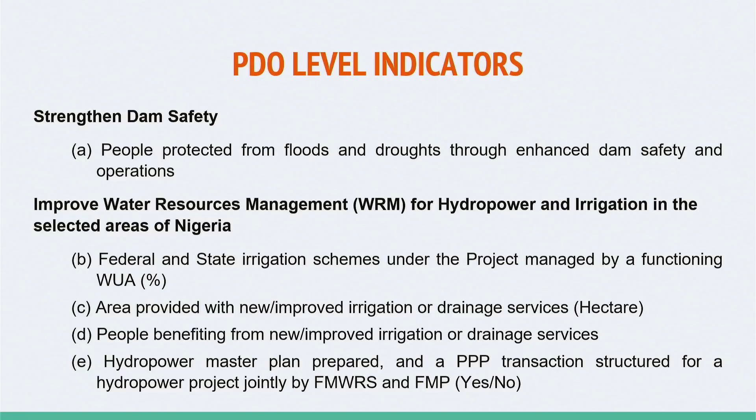So briefly, I will take us through components 1 and 2 because those are the ones specific to dam safety and the Department of Dams and Reservoir Operations.

On component 1, institutional strengthening and capacity building for water resources management, an overview is that the SPIN project will focus on strengthening institutions and building capacity for water resources management at the federal, state, and river basin levels, to promote integrated water resources management and achieve the food, water, energy nexus in Nigeria.

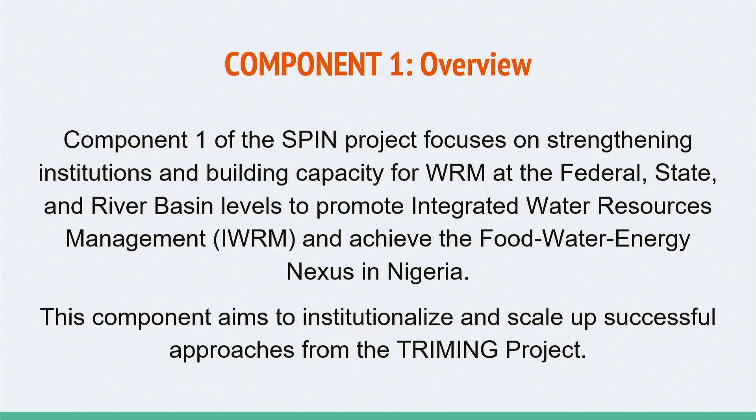This component is aimed to institutionalize and scale up successful approaches from the TRIMING project, which incidentally will be rounding up in a few days. So some of the key objectives and activities under component 1 include...

Strengthening regulation, developing and adopting the national dam safety guidelines and protocols, which was mentioned to us earlier. It is the first assignment or objective of the project. It will be led by the Federal Ministry of Water Resources and is a performance-based condition, which means that if the ministry is not able to do this, we will not be able to access the funds that are available for us to use for the dam safety component.

And for the irrigation side, it will be developing and updating water laws to legally recognize water user associations in participating states. This is actively being done right now because all the states that have shown interest in being part of this project have enacted their WUA laws in their states, and some of them are ongoing.

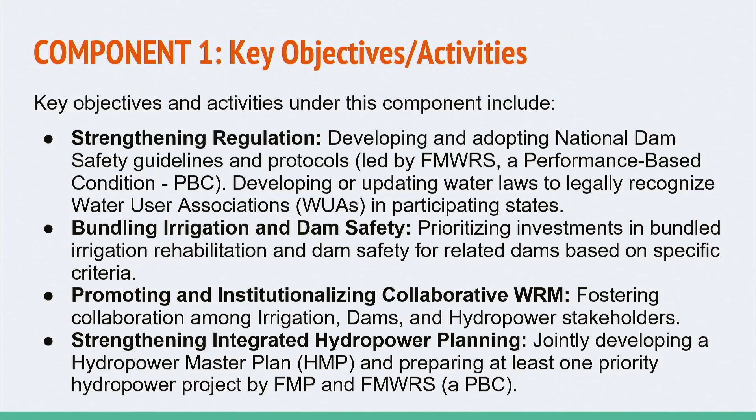Another of the activities is bundling irrigation and dam safety, prioritizing investments in bundled irrigation, rehabilitation, and dam safety for related dams based on specific criteria, and promoting and institutionalizing collaborative water resources management, fostering collaboration among irrigation, dams, and hydropower stakeholders. Then the last objective will be strengthening integrated hydropower planning, jointly developing a hydropower master plan and preparing at least one priority hydropower project by the Federal Ministry of Power and Federal Ministry of Water Resources, which also is a performance-based condition.

So I will move to component 3, which is specifically on improvements in dam operations and enhancing dam safety. This is an overview of that component. The component will strengthen the dam safety management system in the country and will rehabilitate and improve the safety of prioritized dams and associated appurtenances.

It is, however, good to note that the SPIN project will not be financing the construction of new dams. Planned activities are not intended to alter the original schemes and change their nature or expand dam extents to make them appear as new or different schemes.

Priority will be given, of course, to selected dams that provide downstream irrigation services to the schemes, which will be identified under component 2, which is on irrigation modernization, and to some of the dams we'll identify as high risk from the ongoing risk screening exercise we're doing. I think Engineer Ogumakiwa and Engineer Marvin will give us more details into that exercise.

The safety of dams is key to climate adaptation by ensuring water delivery for water supply, hydropower, ecosystem conservation, and irrigation to mitigate droughts, protecting against dam break flooding, and storing excess water to mitigate floods following high precipitation.

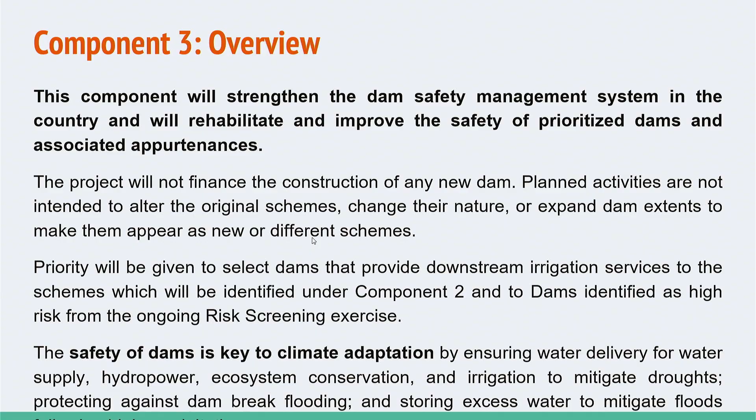Some of the activities and objectives of this component will be to conduct a dam safety portfolio risk assessment exercise, including establishing and implementing a risk indexing screening method for dams in Nigeria and selecting dams for rehabilitation works. This has been in earnest for some time now, and I believe over 20 dams have been screened so far, and it's ongoing. Our intention is to get to 100 at least.

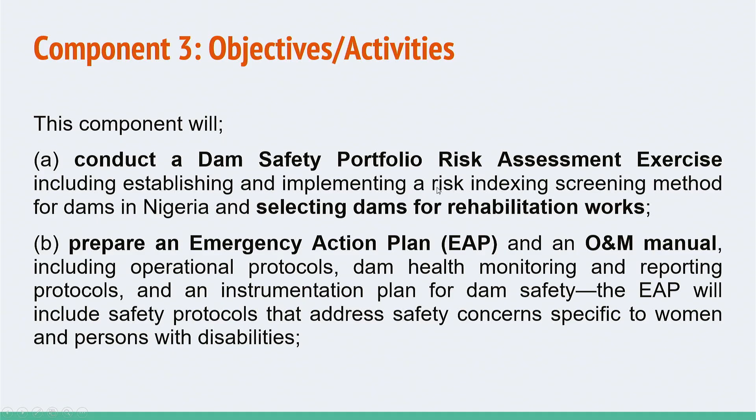Then prepare an emergency action plan and an operation and maintenance manual, including operational protocols, dam health monitoring and reporting protocols, and an instrumentation plan for dam safety. The EAP will include safety protocols that will address safety concerns specific to women and persons with disability.

And also to perform rehabilitation works, including measures for seepage reduction, hydrological and structural safety measures, strengthening of main dam body and foundation, and improvement of basic dam facilities and dam safety instruments.

And then to prepare and implement sediment management plans through bathymetric surveys and feasibility studies, piloting of institutional models, and plans for treatment of upstream drainage catchments with construction of sediment retaining check dams and riverbank protection structures.

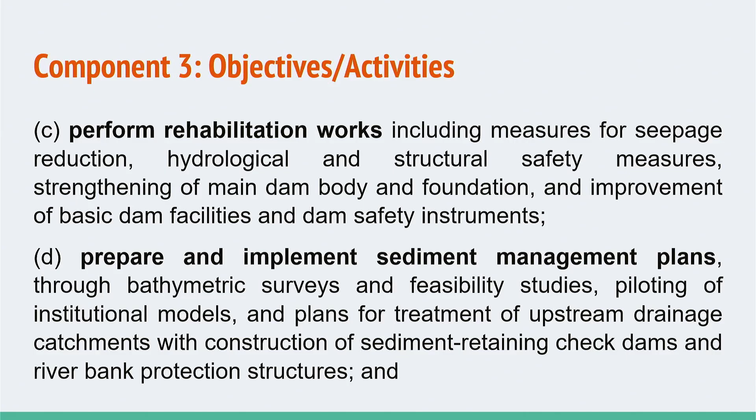And also to apply nature-based solutions to dam reservoir operations and management, such as the use of natural floodplains for flood risk reduction and improved sedimentation management practices through improved operation and mitigation of adverse land use practices within the catchment.

This is just a note to say additional details on how we intend to do this are in the project appraisal document and the annex of technical notes on dam safety.

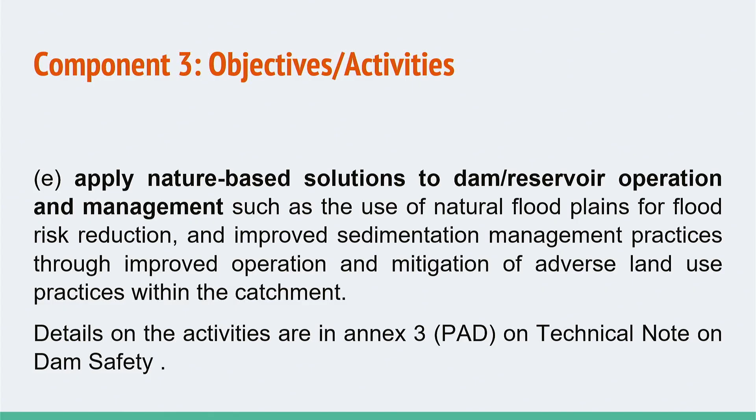So for the current status of the SPIN implementation plan, currently the loan has been signed by the IDA World Bank. The loan agreement has been signed by the Honorable Minister of Finance. The Federal Project Management Unit has been established, which contains the technical units on power, dams, and irrigation. The Project Steering Committee has been inaugurated, and the Federal Technical Committee as well.

We are currently in the process of engaging a dam safety review panel of experts that we will keep for supervising the implementation of the component on dams throughout the project life. The selected state governments that have met the required criteria are being engaged, and a formal implementation launch of the SPIN project will be next month, just as the TRIMING project will be rounding up on the 30th of June.

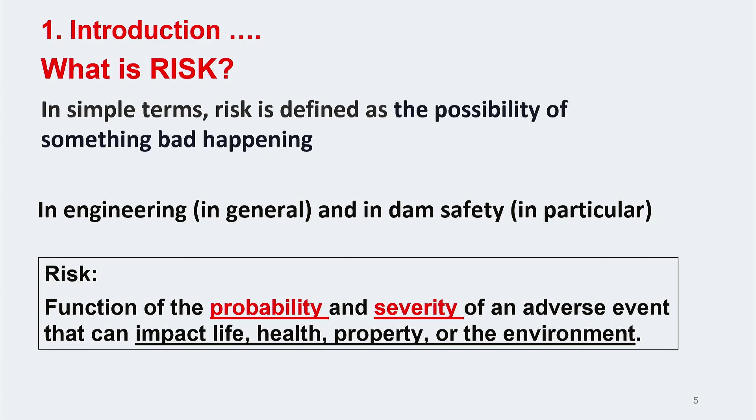So now the concept of risk assessment. I've discussed the probability - I'm sorry, I was supposed to have taken this presentation with Engineer Dixon. Okay, so thank you very much. I think I need to bring the mic closer because of the online participants.

So the concept of risk assessment, like I said, has to do with measurements. And risk assessment in dam safety provides characterization of probability of adverse consequence to people, property, and the environment resulting from dam failure. Like I mentioned earlier, we'll always be referring to the consequence of the things we do, and they can be measured in the way we know, of course, the probabilistic way.

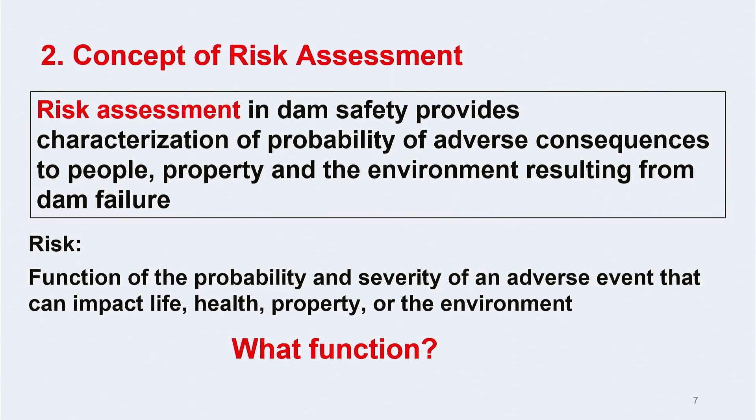So when we are talking about a function, then a function of what? Certainly some parameters have to be clearly defined. Here, we now look at risk as a function of probability and, of course, consequence. So now we are talking about the measurements and how you can express it - it has to do with the probability, which relates to consequence and severity. That is the measurement.

And the other method is by analytical method, which is usually based on rigorous calculation. And of course, even the graphical method usually comes from the analytical method and is expressed in graphical form.

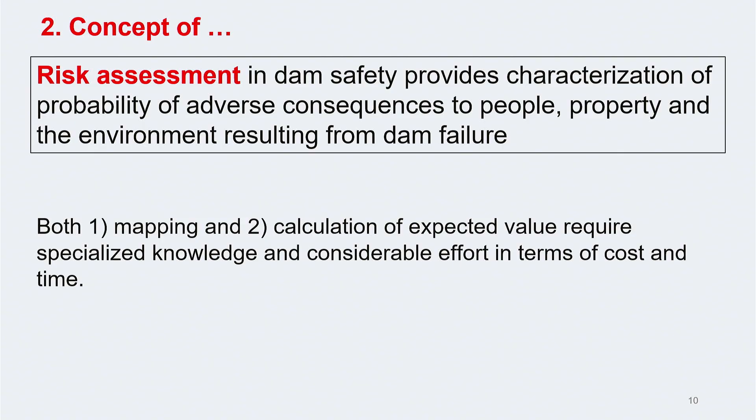But since a new approach has been presented, this is the risk indexing that we are talking about today. It has been mainly presented on the project of the World Bank, especially during their intervention in India and Brazil, and we will be able to have more details of what risk indexing is all about.

If we go into their website, we'll be able to download this document on portfolio risk assessment using the risk index method.

So the purpose of risk indexing is to develop the risk profile of the entire portfolio of dams. Perhaps when they are making interventions, there will be a series of dams in a portfolio, like Dadinkowa Dam, Gurara Dam, Chalawa Dam, Tiga Dam, and a list of so many. You can't just, within a framework of funding, say you are going to rehabilitate all of that. You have to provide a very justifiable method that is scientifically proven to make this assessment and then take decisions.

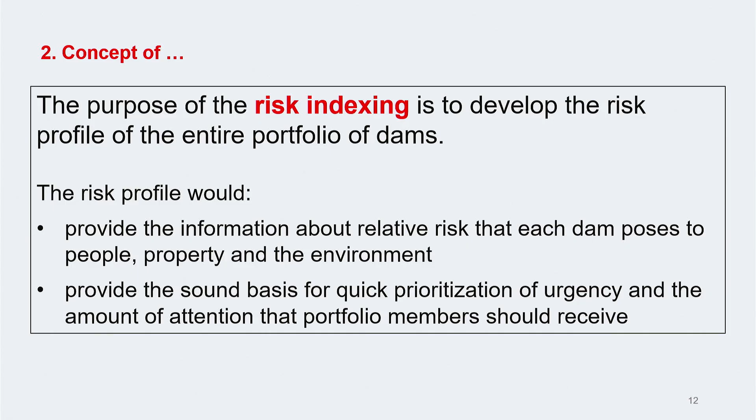So by the time you have the list of all the dams and you have done the risk indexing, you will be able to do a profile that looks like this. Assuming Dadinkowa is dam 1, and Gurara Dam is 2, you have 1, 2, 3 in that order. You find out that the risk index is the one reflecting on the vertical column, and the higher the risk, the higher the index.

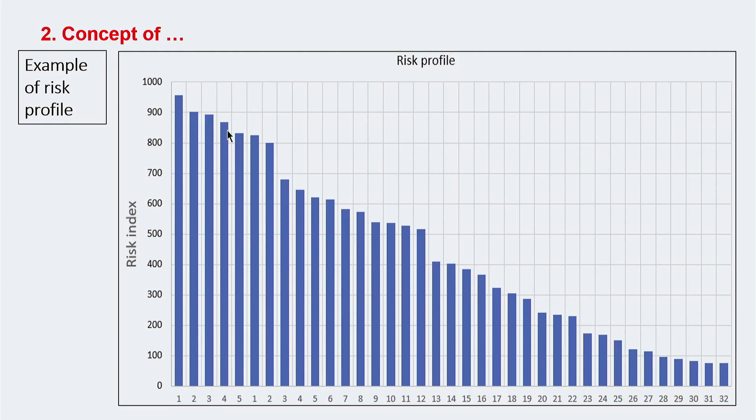So now the risk indexing tool. Just a brief background on the risk index. What is risk index? It has to do with a function of fragility index and potential impact. So you can see how it is expressed as a function. Risk is always a function.

Unlike what you have in the probabilistic method of measurement, where you have to do a ratio or provide them in percentage, in this case you are going to determine all the parameters as indices.

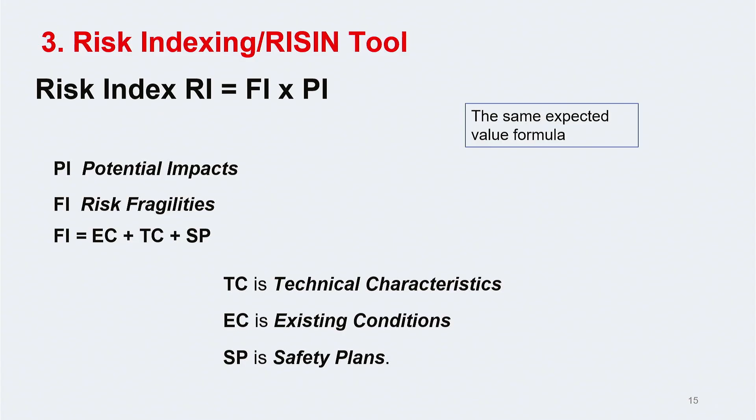For the fragility index, it is expressed as a summation of the existing condition, the technical characteristic, and the safety plan. So there are three key aspects that you have to sum up: the existing condition (EC), the technical characteristic, and the safety plan. These parameters are clearly defined there.

So at the end, these are the composition of all the parameters in each of those indices. For technical characteristics, you have issues of aging of the dam. As the lead presenter has noted, over time, whatever you do and whatever you don't do may affect your dam, and this has to do with when a dam is constructed over time. So the issue of age — an index has to be provided on whatever you have been doing on the dam.

You also have issues of design, which he also noted, so you have inflow, design flood, and of course the hydrology. You also have other parameters that have to do with the location, the seismic activities, the landslides and the stability of the land. You also have issues of the length of dams, then the appurtenant structures like the conduits, the spillway, and all of that, including filters and the foundation and abutments at each end.

For the existing condition, when you visit dams, the status of the dams has to be reported, and it could be positive or negative. It could be issues of seismic resistance, or availability of flow discharge capacity data, the flow discharge, the backup plans and backup powers, and all issues that have to do with the existing conditions. So physical condition of the dams during site visits is very crucial.

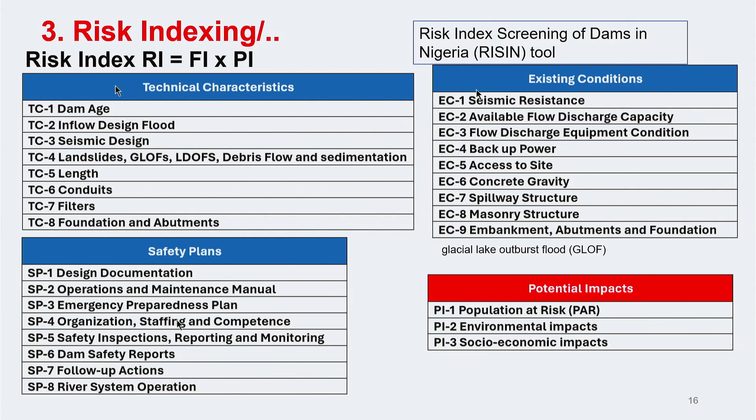Yeah, still on the index, RISIN indexing. So the probability, now how do you index? The issue now is how do you do this indexing? So unlike the probabilistic method, in this case, you have to provide a scale. It's either you are providing a weight or you are providing a score. And this score has to be scientifically justified.

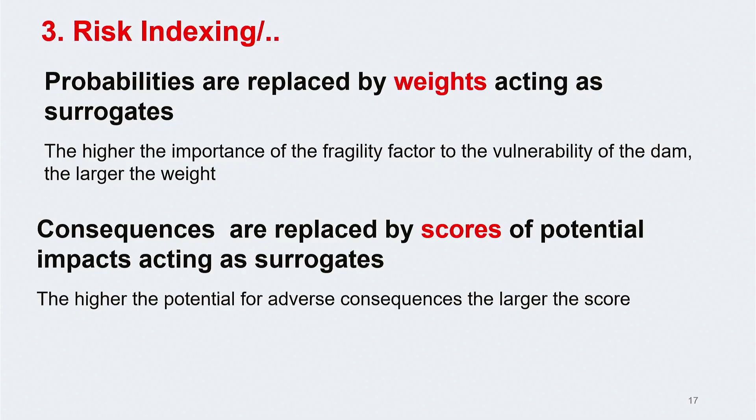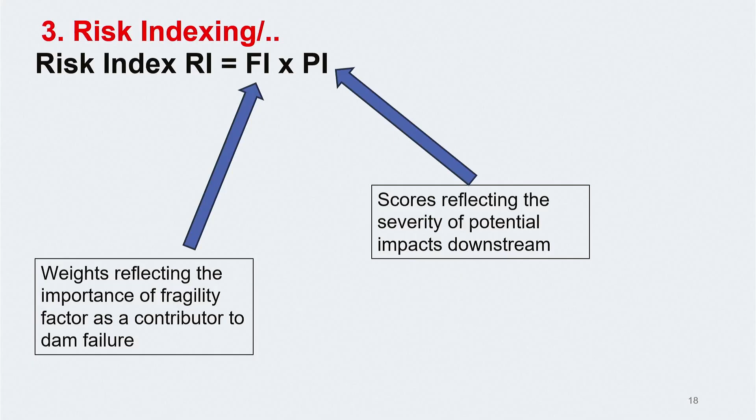For the fragility index, the probability in this case will now be replaced by the weights, while for the potential impact, these ones will now be replaced by the scores. Here, RISIN indexing is once again expressed as a function of the fragility index and the potential impact. So for each of them, like I earlier mentioned, the fragility index will be weighted while the potential impact will be scored.

So at the end, an Excel sheet was produced. The Excel sheet has all these parameters aggregated into it. So you have various parameters. This is the case of the technical characteristic, a reflection of the land form and the stability of the land. So you have different information that have been populated in this tool, which will guide you to perform scores. The scores have already been defined there, and all you need to do is fill in the scores in the red portions that have been highlighted in this sheet.

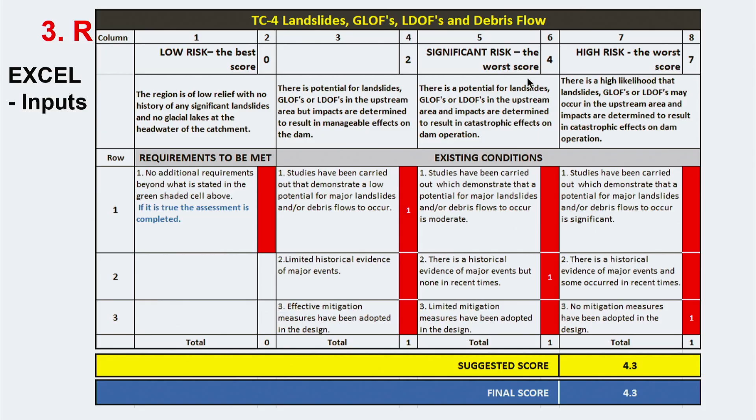So the aggregated score will now be provided. The aggregated weight will now be provided. So in the tool, you also have the input section and you also have the output section. This is a key reflection of what you see in the output section. So at the end, this information for technical characteristic, existing condition, the safety plan, and of course the potential impact are aggregated and then presented either as a percentage or as the index, as the case may be.

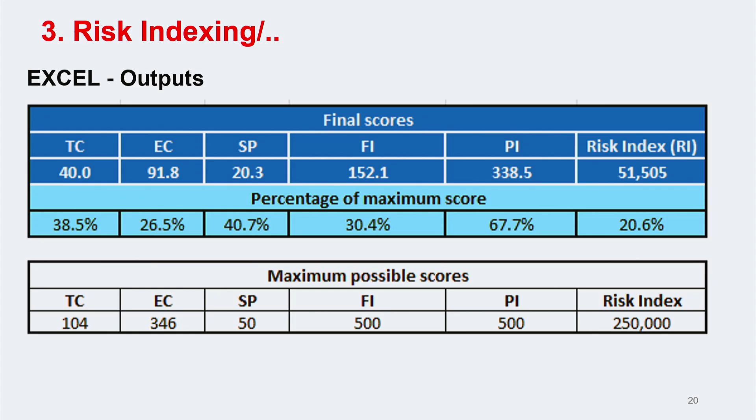So the spreadsheet will also provide you the summary of all the parameters that you have created. So you can see here for the technical characteristic, you have the various scores and the percentages that have been scored for each of the parameters that are associated with technical characteristic. Similarly, with the existing conditions, you have the scores and, of course, the percentages expressed and summarized as related to all the parameters that has to do with the existing conditions.

So how did we come about these scores and this weight? I know this question will be in your mind. Before the workshop that was held in November, experts were actually given some of these parameters to assess. And then based on their judgment, they had submitted various scores. And before then, there were also some analyses that were presented that were made based on an analytical hierarchical process.

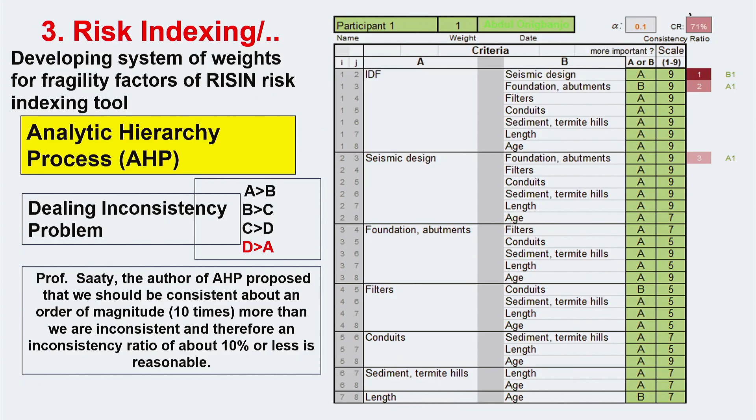So this is a presentation of one of the parameters, that is the technical characteristic, and what was provided by the AHP versus what the experts have provided. So you can see that if you juxtapose these two together, they are within the same tolerance of 10%.

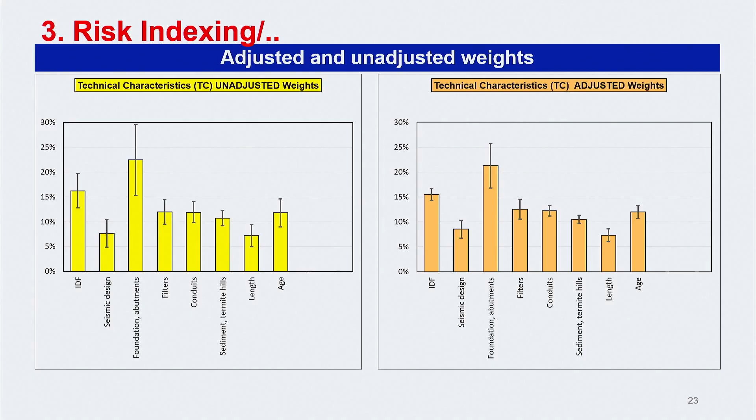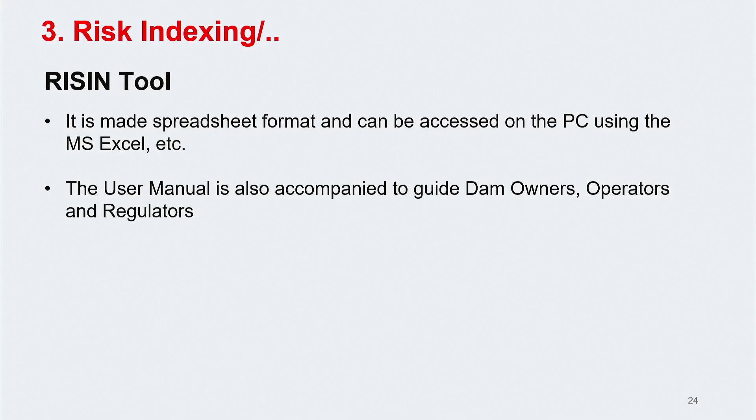So just a quick summary. The risk index tool has been provided as a spreadsheet, and it can be accessed either in Microsoft Excel or in other formats that can be adopted by spreadsheet software on your personal computer. So we also have a user manual that we can share with participants that will guide them on how to fill in the tools.

So the next session is the progress of risk screening of dams in Nigeria. During the workshop in November, 21 dams were successfully screened. The risk assessment and screening of the 21 dams were successfully completed during the workshop for the development of risk screening tools in Nigeria.

Based on the risk screening, you can see the risk index profile expressed, and it is easier to make a categorization of the risks. The highest risks are highlighted within the red shaded area. The medium to moderate risks are those highlighted in pink and yellow. And of course, those with lesser risks are the ones in green.

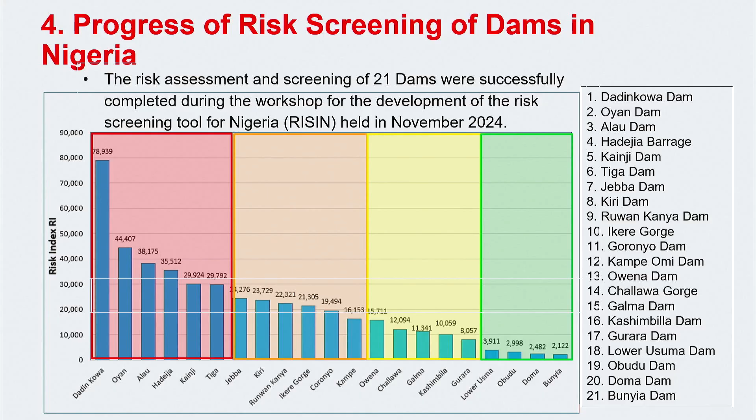So you can see the list of the 21 dams that have been assessed. And currently we have more dams, the risk screening of more dams ongoing. Like it has earlier been noted by the presentation on the SPIN project, 100 dams have been targeted in Nigeria for the risk screening within the dam portfolio.

So in order to achieve that, a quality control and quality assurance team has been established, and currently they are working to ensure that the screening of 42 dams are completed by the end of this month.

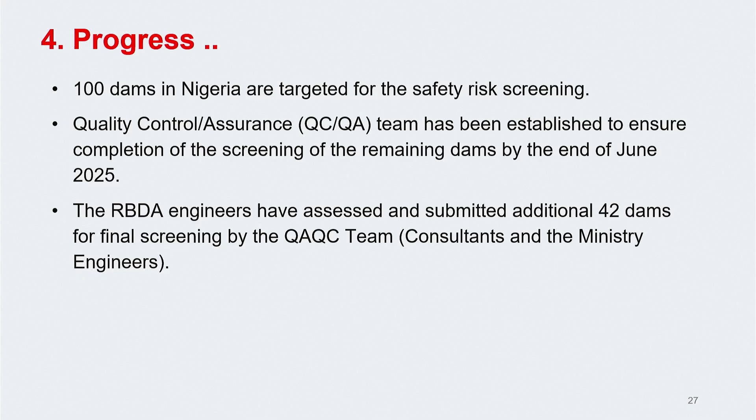So what are the challenges? We all know that data availability is a problem. This is a peculiar challenge for all those who have been carrying out the assessment of the risks of dams in Nigeria.

And it is a major requirement. Data are a major requirement for the risk screening tool, and without data, the quality of assessment can be greatly impacted.

During the risk screening, we also have more information that could not be accessed from the river basin, and those information are largely associated with the technical characteristics and issues, even field visits to assess the existing condition. Safety plan documents are also not available.

Like it was earlier noted, even issues of emergency response plan and preparedness are not available to ensure that population at risk are adequately safeguarded in the event of any emergency.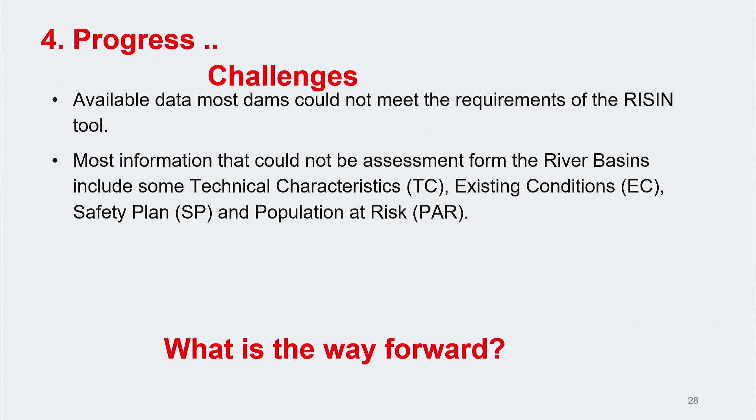So just a final note, the RISIN tool offers a modern and simplified means for safety risk screening of a set of dams in a portfolio. The tool has been successfully utilized for the screening of risk index of 21 dams, and we still have more dam screening ongoing. Well, in itself, it is not a means to an end.

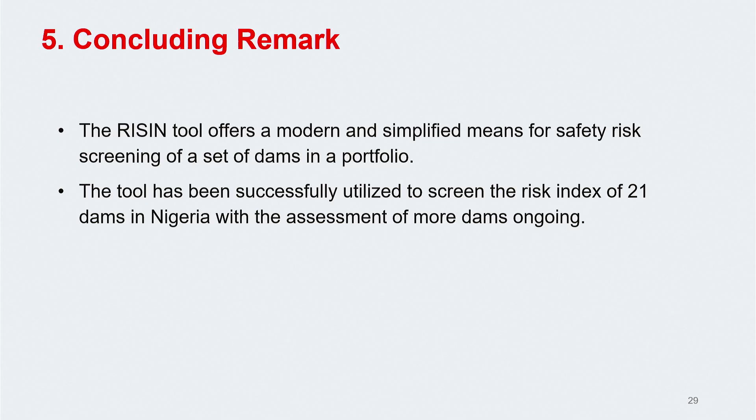The note is this: although the information obtained with the help of the risk index can be extremely useful for preliminary screening or ranking of riskier dams, especially for a large portfolio of dams, it is recommended that those identified as higher risk dams should be subject to further detailed risk assessment using PFMA or other qualitative and quantitative risk analysis.

This will inform decision making on priority remedial works at the next stage.

So it is just a way to pass across to us that as much as decisions are made, there will also be need for further technical analysis. The PFMA has to do with potential failure mode analysis. Then the quantitative and qualitative has to do with the technical aspects that will ensure that these dams are actually suitable for intervention. At this juncture, I want to thank you for your attention.

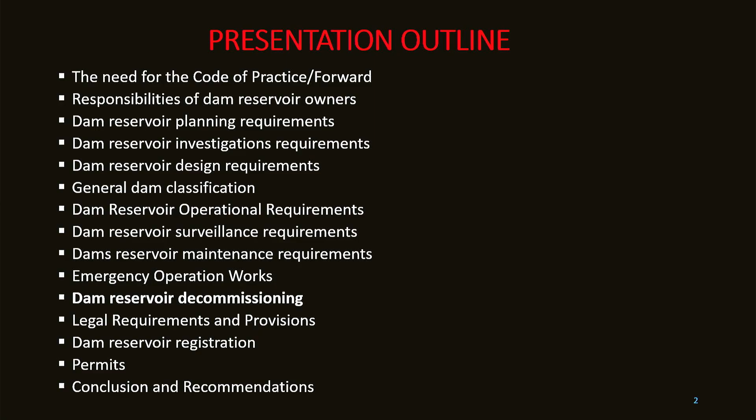Now, let us look at the forward itself. The Nigerian Code of Practice, where it talks about dam reservoir operation in Nigeria, was actually prepared by a technical committee made up of almost all the stakeholders in Nigeria. This code is quite applicable to issues of development, operational procedures, specification for personnel, and equipment to ensure safety, and the management of most of the dams that we have.

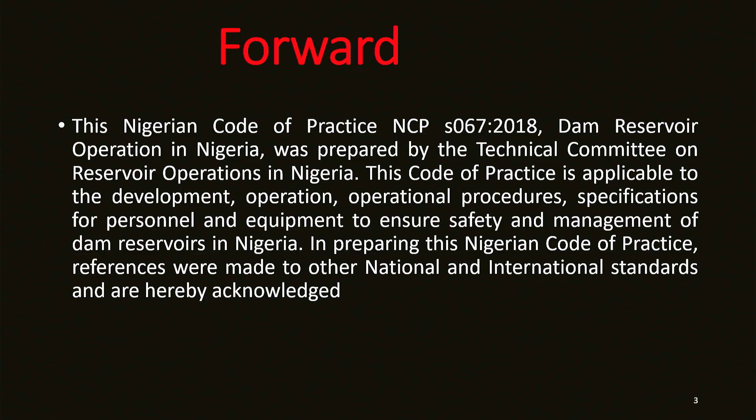In preparing this code of practice, references were made both internationally and nationally. We looked at all the codes in existence in most countries, and also looked at what we have in Nigeria, before coming to the final conclusion.

You quite agree with me that, as a form of introduction, dams are normally built to control or store water flow, basically, but we're going to go into some of the classification as we move along. Dams have occasionally failed, and uncontrolled release of water sometimes leads to serious consequences in terms of damaging infrastructure, lives, properties, and so on. This is what we want to avoid.

It has also become very necessary for us to look at the various guidelines we have, and what are the standard procedures as regards minimizing the risk impact of most of what we have.

When I was giving the goodwill message, I did mention that the dam department, which represents the Federal Ministry of Water Resources, is actually the EFCC. People don't look at it from the technical aspect, what they are supposed to be doing, and to ensure that the lives of everybody is safe for all of us to actually be in this country. So it is actually intended for safety purposes, which is in line with what we are here for.

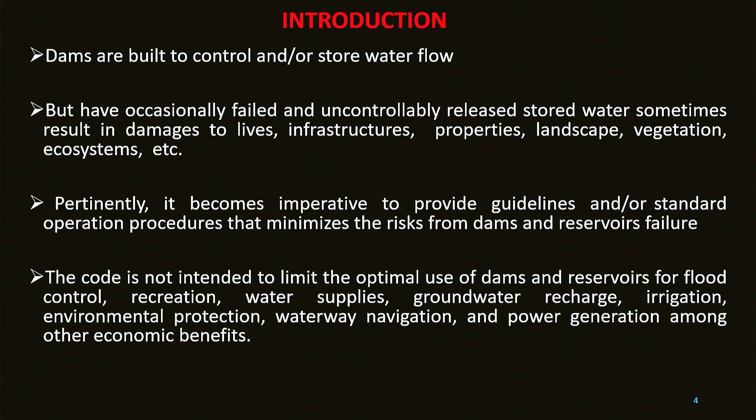Now, let me also make mention that the code itself does not really limit it in terms of the various water supply that we have, flood control, recreational, no. But how are you going to operate most of this to ensure that there is safety in terms of whatever we are doing?

I use this to kind of relate what we have at the moment and some of the things I'll be mentioning. Those of you who are quite familiar with Goronyo Dam, this is what you have in there. Now, the cross-section that you have there, in terms of the various clay layers as part of the embankment, and of course, the various lithological units within the dam, and how do you monitor?

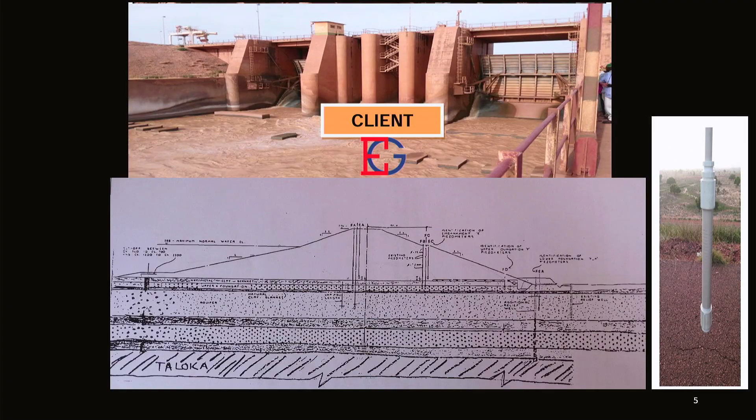Now, the small test tube you have at the right hand of it, we noticed that after the dam construction, actually it was completed in 1983, we noticed that most of the monitoring system that you have there were completely blocked. And for you to have safety, there's a need to have most of these very important aspects in terms of the monitoring.

So, for the benefit of everybody, and also for just refreshment, to refresh your memory, we just try to look at what is even a dam. And of course, it's strictly just an artificial barrier.

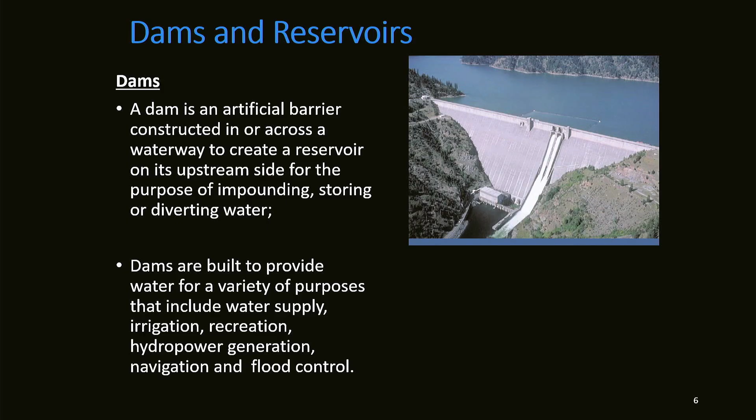It's constructed, it could be across to ensure that water is trapped, and of course, to impound this water for storage for different aims and objectives, like water supply for example. It could be irrigation, recreation, hydropower, and flood control. This is just for what I call a refreshing kind of reminder.

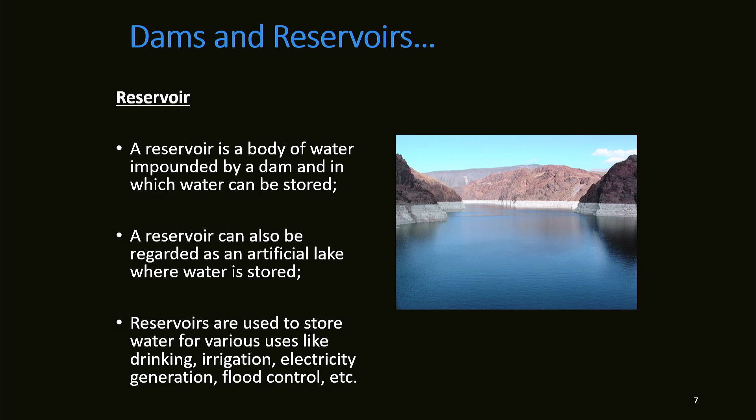Now, sometimes in the code, you'll see differences between reservoir and dam, and sometimes there's always this confusion. We'll be using it interchangeably because when you talk about the structure, you talk about the water that's impounded within that particular structure, excluding groundwater reserve, because when we talk of groundwater storage, we also refer to them as reservoir. But in this sense, we are not strictly referring to groundwater input. So let us take note of that.

Now, very importantly, if we're talking of failure, we're talking of safety, there's a need. I think the first presenter in the morning did mention quite a lot on some of those definitions. For the Goronyo project, our aim was to do this installation to ensure that the issue of monitoring is actually enshrined or reactivated within the dam, and also to ensure that the safety is maintained.

When we want to talk about failure, we're referring to the catastrophic characterization of sudden release of water. And when you have this occur, it goes with quite a lot of damages, either to properties or materials, especially when the course of passage is blocked by development and, of course, a lot of structures, which has actually happened in most of the areas that we have today.

So the safety aspect is the act of ensuring that the integrity and the viability of the dam is maintained, and as much as possible is not a risk to properties, to life, and to the general environment. Let us take this in context, and based on this, that is why the code is very, very important. There's a need for us to have a procedure so that when you are talking of safety, you are talking of failure, the bottom line is we want to protect life and properties.

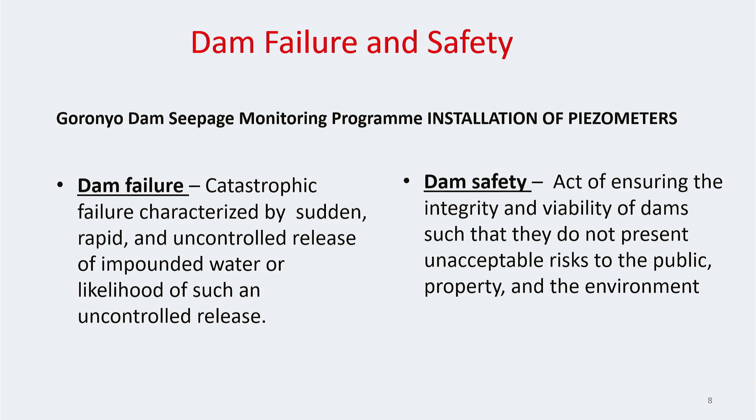So, why the need for the code?

Having given the introduction, we felt that the code should provide guidelines and the minimum standard in terms of the dam, the reservoir, as regards safety, covering aspects like what has been mentioned in terms of inspection, monitoring, operation, and maintenance. It also emphasized proactive emergency planning geared towards ensuring that the vulnerable community downstream are informed at the appropriate time to ensure that nobody suffers undue losses.

It also outlined the minimal requirements that are supposed to be followed in terms of national application. The code identified the potential risks associated with such reservoir operation, like flooding, structural failures, and environmental impacts. These are very, very critical when you're talking of such a code.

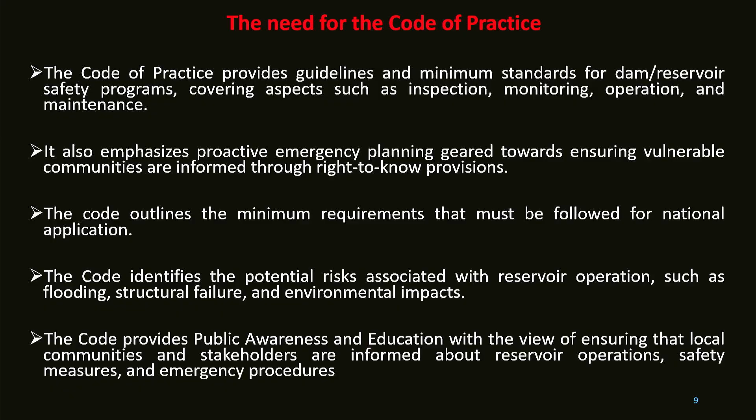There's a need for public awareness, for education, to ensure that everybody is carried along. Take the example illustrated by Engineer Labi. He mentioned that the villagers, the community in that area, noticed an unusual kind of movement within the dam area, and they had to report it. Within just a few hours, everything gave way. So that is why you need a constant reminder, education, and public awareness to ensure that most of these are taken into consideration.

I mentioned that I will be referring to a very practical example, the Goronyo Dam, and try as much as possible to synthesize some of the things that you need to do, what is very essential in protecting and looking at the code.

The first is the various characteristics of the dam, as I mentioned. It's a large capacity dam. In a while, I'm going to tell you the various criteria. Most of you are engineers here, so at least just a reminder. And of course, what type of hydrological zone? We have almost 8 hydrological zones in Nigeria, and where does this one belong? The river that it's talking about. So it gives you the characteristics of that particular dam.

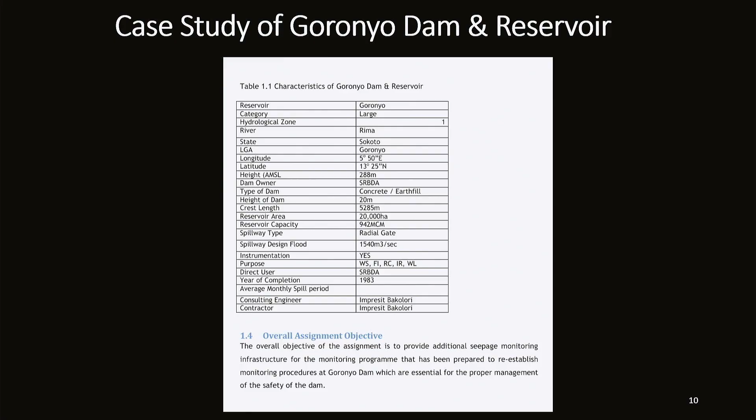Next, you have to look at the lithological formation that we have in the dam in Goronyo, for example. Now, for about 0 to about 15 meters, a kind of embankment was done, and these are mainly different compositions before you came to the first, what we call the clay blanket. From the clay blanket, to the second one, there's a kind of intercalation of a lot of sandy material within those areas. And of course, another layer was done before you came to the last aspect, which is the second blanket.

Now, this is very important because if you have to monitor, for you to assess and do your portion as a dam owner, as the site engineer, there's a need to have a mental calculation of what you are doing. And this is where monitoring is very important in terms of whatever structures you want to put in there for you to be able to do that.

Sometimes when we just talk of monitoring, people look at it as something you just look at and move on. Even for you to install a piezometer, for example, takes quite a long process. You have to do a lot of drilling.

The one that has been vandalized took us quite a long time, we have almost 43 of these piezometers drilled. Of course you have to first ensure that it's appropriately logged for you to know what formation and how you are going to do your final installation.

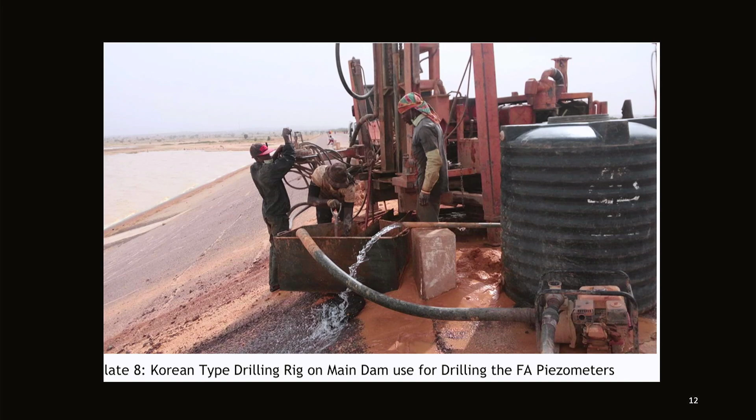Most of the time for the layman, a borehole is just a structure that can be drilled either by hand or by well for you to extract water. But technically, we are looking at a hydraulic structure that when properly designed and constructed will permit the economic withdrawal of water. So for you to be able to monitor, there have to be certain conditions that are quite necessary, and these are very important, especially for monitoring in terms of safety.

These are some of the ones especially at the top of the crest. In here you have quite a lot from the various stratigraphical columns in the main crest. These piezometers are structured in such a way that you can monitor so that any kind of deviation from what you have there, you're able to report exactly that there's some crisis. That is the whole idea of monitoring.

Dam inspectors, especially in advanced countries, are well paid. I don't see why you can't make quite a lot of money just being a dam inspector. If we have over 400, 450 dams in Nigeria, we don't even have the personnel to ensure these are adequately monitored, to have that extensive on-the-spot assessment and good documentation in terms of data collection. We have to revert this.

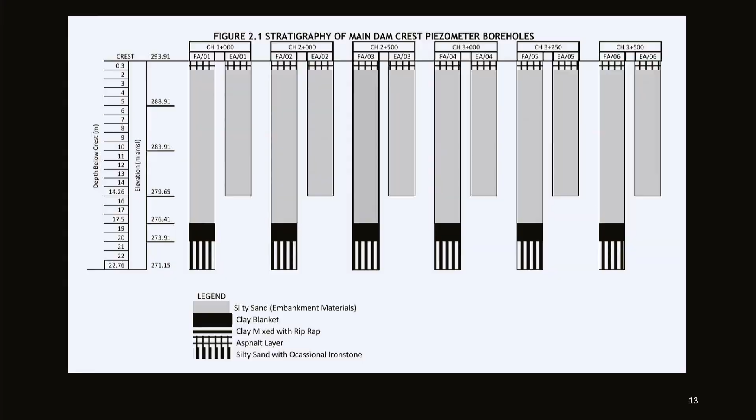We also look at the various aspects that it takes. Now when you just have a piezometer, people look at it like, what does it take? As an engineer who is supposed to be supervising, ensuring these are done appropriately, there's a need for you to understand what things are put in place for you to have that data we're talking about.

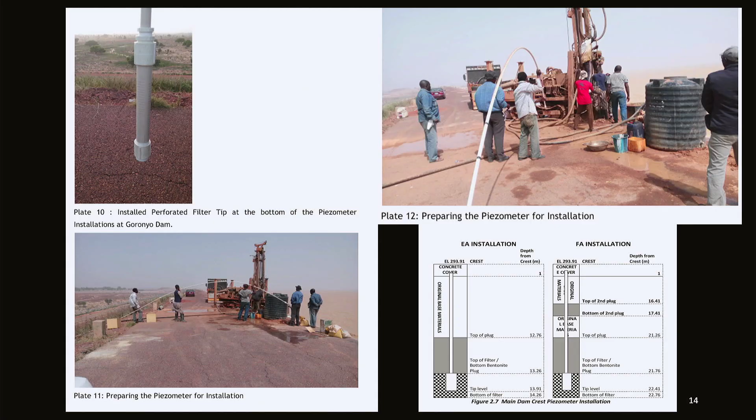This is just a small illustration where a lot of the drilling is taking place. These are special piezometers formed through the manufacturer, because you have to give them specification or what type of piezometer you have. You have to come out with the various designs to arrive at this, so that anytime you are measuring, you know you are measuring based on facts. These are quite critical for all of us.

At the end of the day, you have this kind of structure where you can just open most of this and take your measurement and document it. You could imagine taking a series of this data for months, for years and years, and effectively and religiously monitor it. Then you're able to see how safe those dams that you're actually looking at are.

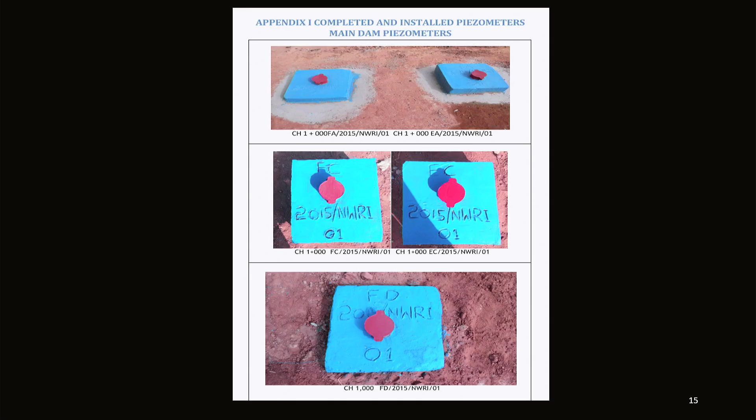So it's very crucial that we take a look at all this. At the end of the day, you're going to have a series of data from that monitoring that will help you interpret the safety in terms of management, and whatever could come in terms of collapsing of most of what you have in that dam, which will bring risks to the structures.

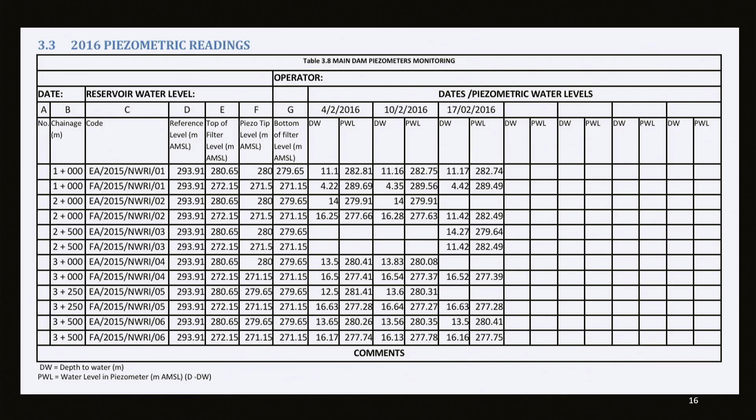So what is going to happen now in terms of responsibility? There's a need for us to know the responsibilities of the dam owners, the reservoir owners. What it means is that they are supposed to obtain a permit for the construction and safe operation of the dam. It's like you cannot just drive without a driver's license.

I want to implore especially all the various management of dam departments here: you should take it as a project, go around all the dams, request the certificates of most of those dams. Where did you obtain the permission to construct a dam? This must be put in place so that we can have a well-structured, well-orderly society where people don't do things without the laws.

There has to be a well-registered professional, like a water resources engineer or civil engineer, who is going to man and operate this in terms of maintenance. You don't just see anybody mounting into the aircraft and say it's a pilot. No, you are supposed to ensure that most of those professionals are licensed by registration and are qualified to be inspectors of most of those codes that are supposed to be prepared, aligned with what is in the code.

Shall use the guideline provided in the code to produce documents that are mandatory to guide safe operation. So, if you go to the dam and there are no piezometers for you to measure, you cannot operate that dam because most of the safety conditions are not there. This must be taken into consideration so that the code is operated effectively, and complies with everything.

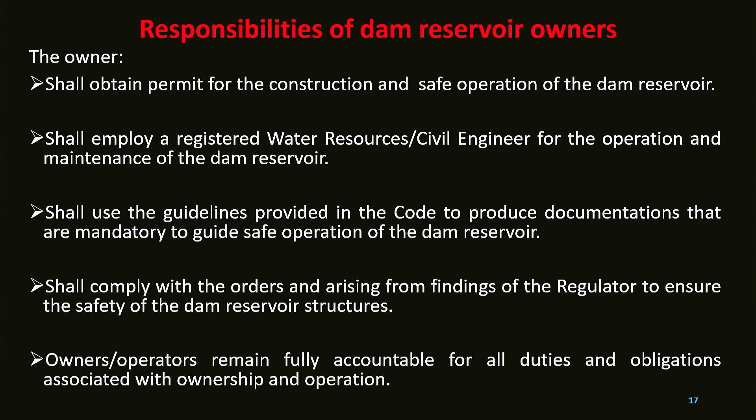So what are you supposed to do? We still also have the dam reservoir planning. There is no way you can even start in terms of the design or the conception of having a dam. There has to be pre-construction planning, as identified in the morning, to identify the very potential sites. It is not everywhere you can put a dam, as really pointed out by my friend in the morning.

These must be taken into consideration, and these are the permit criteria that must be given. Even if you are the head of state and you say go and put a dam there, as professionals you have the right to politely tell him that this place is not conducive for a dam. Why should you be wasting money when it is not conducive?

Now when, for any reason, the dam decides to fail, who are the people who are going to be responsible for this? I think we must come back to our senses and we must do the right thing at the appropriate time. We must define possible project configurations.

We must establish the type of project that is quite necessary for the best site to be sited, based on the appropriate technical consideration. In addition to the preliminary planning stage for the dam, the following must also be taken into consideration: the formulation of the project purposes, the timing, so that you can be able to get the necessary permits that are required for this.

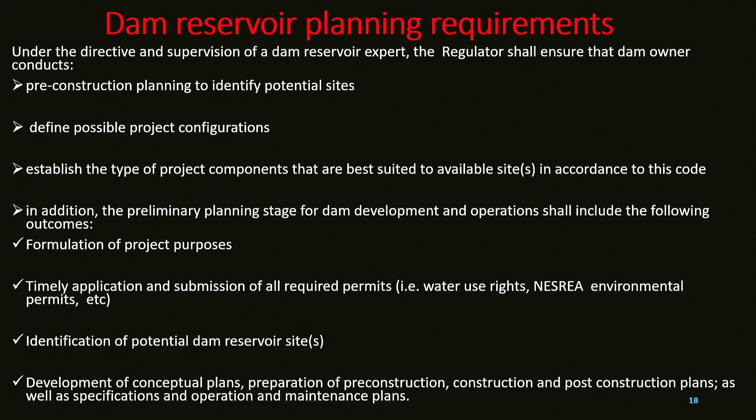We must identify exactly the potential of the dam. We must develop the construction plan, prepare in terms of construction, and the post-construction plan, whether it requires decommissioning at a particular stage. All that must be taken into consideration.

We must also look at the various stages that are quite important. For example, it involves reconnaissance at the first stage. These need to be gathered in terms of information that are quite essential. We must have a conceptual plan that is based on facts and not on orders from above.

We must complete the selection of the desired project sites for the final design, and when it comes to the final design, the right things must be done. At this stage, you must constitute the investigation team made of engineers, hydrologists, and hydrogeologists, to ensure that the appropriate thing is done. Stage 2 shall include, for example, the technical investigation.

This entails the geological aspect, because whatever we are putting on the soil has to do with the geology. You must ensure that the geotechnical aspect is put in there to corroborate whatever the hydrogeologist, the geologist, and the geophysicist have actually obtained. For example, you are carrying out the geophysical survey to determine the type of formation, not just the formation, but also the content of the clays that we are having.

There is a particular method of doing this. If, for example, you have the crest, there are positions you must ensure the central electrode is adequately positioned to be able to know exactly what type of clay formation, at what depth, how long it is, how extensive, and also what is the plasticity of that particular clay formation.

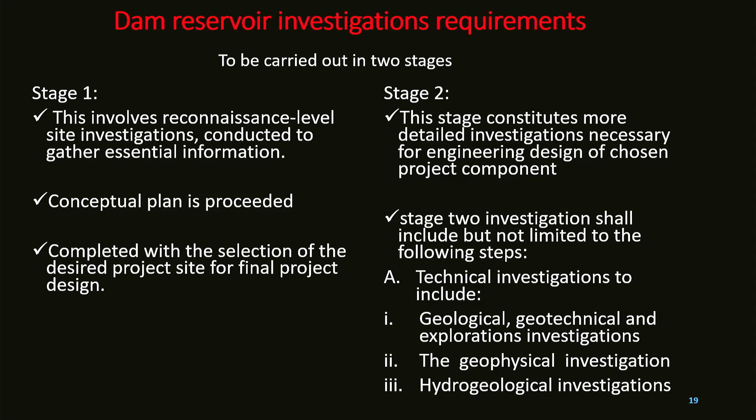This must be followed extensively in terms of the hydrogeology and other factors that are quite necessary in terms of choosing the right site for that particular dam. That is the crest, the offset, and try as much as possible to have a very synchronized aspect in terms of the lithology of most of those places.

This stage 2 continues with determination of the sizes in the spillway, for example, developing an appropriate runoff model for the catchment. So you are not only looking at the site, but looking at the catchment, because, as with Alau Dam, if they had looked at the catchment and seen the possibility of a lot of rainfall coming from the other side, perhaps some of this catastrophic issue would have been avoided in the first place.

So we must do the right thing. We must calibrate most of the runoff models, and of course look at the historical flood data where possible, and assess any operating limitations and criteria that are likely to affect such spillway.

We must also look at the various consequences of potential failures in advance, and try as much as possible to put the right things in the right places in terms of what you are going to lose in remote floods, for example, water supply losses and operational problems. Sometimes it could be accidental, and all this must be put in place.

Sometimes you put a gate valve at the construction of a dam, and for 1 month, 1 year, 5 years, 10 years, nobody has even touched the valve to see whether it is possible to loosen it. Then it becomes useless. Now, at the time you have an emergency, what happens? You cannot even open the valve. And at this stage, it is too late to cry.

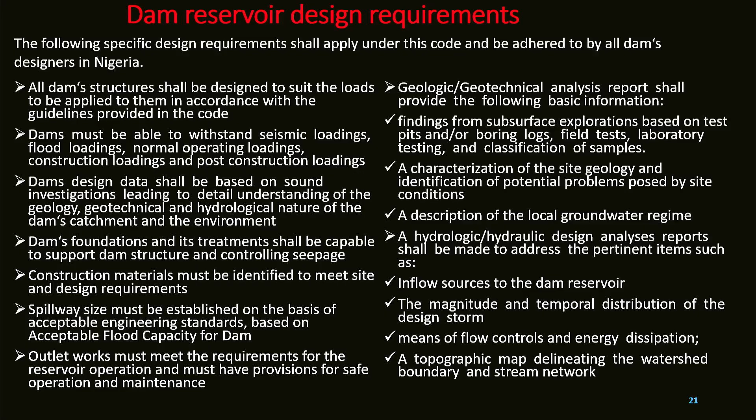Inflow sources for the dam reservoir must be looked at, the magnitude and the temporal distribution of the design storm, and of course, means of flow controls, including topographical delineation, must be adhered to.

We must also look at other aspects in terms of the various classification. Sometimes people don't even know the difference between a small dam, a medium dam, and a very high-class dam. So these are reminders, not just for practitioners. For the high-capacity dam, for example, you must ensure a capacity of even 61,000 plus, with a height greater than 15. And if you look at most of those very high dams, that is the criteria.

The medium one is actually less than 1,233, with a height of between 8 to about 15 meters, while the smaller ones are less than that. These are all criteria that you must put in place. In terms of the hazard issue, for example, how many losses in terms of human life are we having? These are the anticipated losses, and what we call the classification of the losses, for example.

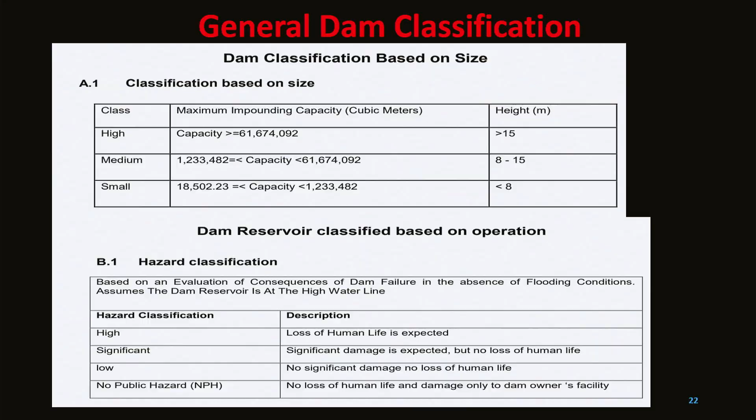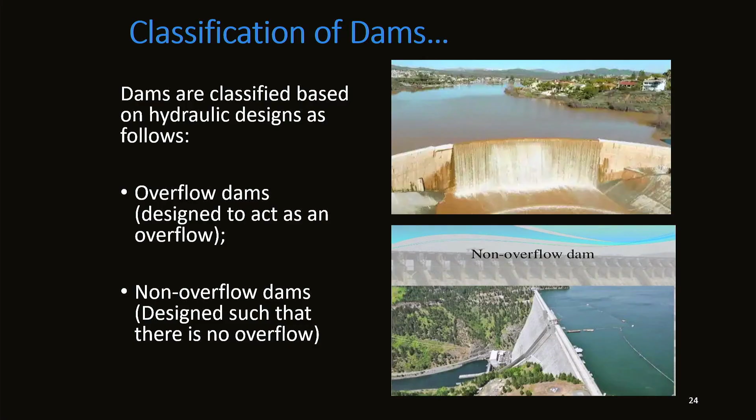These are all issues that must be taken into consideration as inspectors. We must also look at the flow, which of them are flowing and which are not. These are things you should keep at the back of your mind, so when looking at the various criteria and the data form you are using, it should always be ringing bells in whatever you are doing.

The others are the design requirements. This might be more important to the design engineer, the structural engineer, looking at the various dam failure analysis and report which contains, for example the consequences and magnitude of a dam break, how to look at the downstream effects, and of course the hazard classification as already put in there. We look at the design steps, the stability analysis based on the various rock and earth conventional dams we have. Everything is contained in here.

And these are the things you must ensure, not just inspect. I'm going to take a leaf very soon on how you can look at this with maps, and of course the various forms that are quite essential for you to be able to do this.

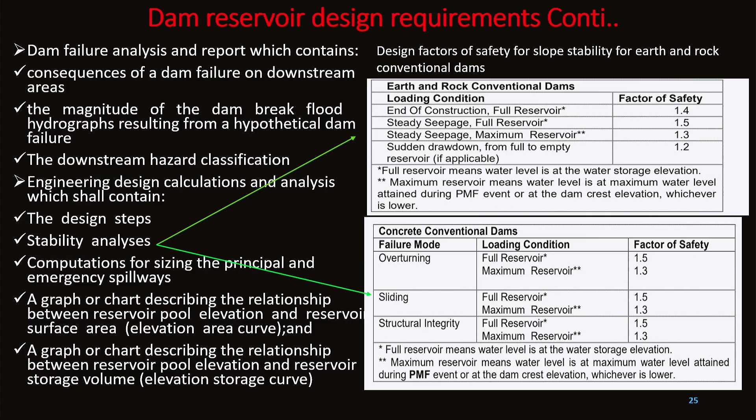Next we also look at the various operational requirements: the dam's reservoir requirements in terms of hydrological safety within that. So they have to build standard operating procedures.

It's like you come in the morning, you want to look at your car. First, open the inside of the car, open the bonnet, check whether the engine oil has gone down or is stable, look at the water. These are procedural. You can't just jump into your car and start it without thinking, because when something happens, it's because you never followed the procedures, and we must extend this to dams.

Dam reservoir operation requires structural safety, looking at the various working equipment that have been installed. Are they functional, for example?

This must be done: the maintenance schedule. Have they been following the maintenance schedule? You are supposed to look every 3 months. Have you even looked at the siltation, for example, agitating what you have in there, to ensure you flush out most of this silt before the dam becomes quite silted?

Equipment data sheets must be provided, the manufacturer manual, and even the dam manual should be there so people can follow procedures. We know very well that we are always in a hurry. We do not want to follow procedures, we do not want to even obey very simple instructions. At the end of the day, it's being penny wise, pound foolish. I think we must do the right thing, and that is what we are talking about in terms of dam safety and management.

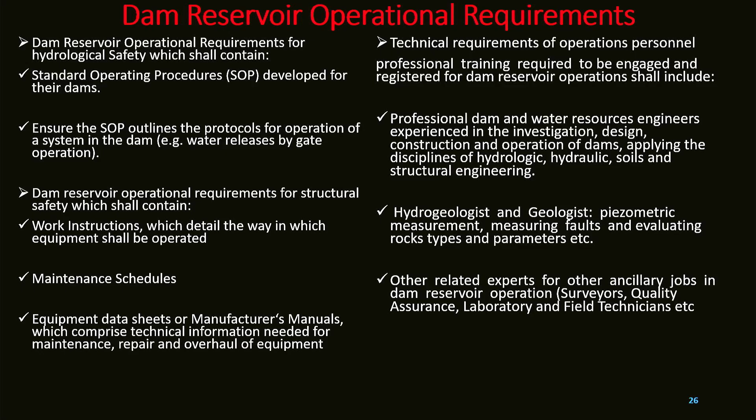We must look at other criteria, for example, what is the quality of the water? You have quite a lot of algae, for example - where is the algae coming from? All these are quite important for all of us to check and ensure that everything is well maintained.

The dam surveillance must ensure that all requirements are done - reporting, analysis, the data, the vegetation, for example. You go to some dams and you have all manner of shrubs springing out with a lot of tap roots extending into the dam, and nobody feels as if something is wrong. The moment you leave it, what happens? It's going to create a lot of fractures within those embankments, and the moment you have that, what happens to the seepage? It becomes quite easy. These are the simple procedures that must be followed.

If there's a need for grasses to prevent erosion, the grasses must be there. If for one reason or another the grasses are not working well, you must ensure new ones are planted. These are the simple procedures we must follow.

These are things you must ensure are in order. You must review and evaluate the instrumentation that is put in there. Are you getting the right instrumentation? Are the batteries working? Is it transmitting from the dam to your office, wherever it's located? These are all issues you must look at in terms of surveillance.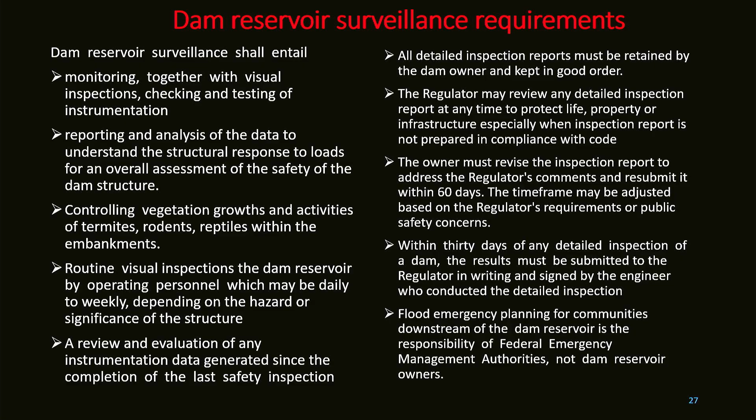In case of concrete, whatever it is, we must look at the drainage system, look at the leaks and cracks within those dams. We must look at the spillway, the blasting operation, and the permits that are carried out within most of those dams, except there are other cases you don't have control over, and this must be looked at. Any debris or rock movement within those areas must be investigated.

What is responsible for the movement? Do you have some issues of seismic activity, for example? Do you have some issue of loosening of the soil, pressure release from the surface? These are all things to consider. Emergency lighting systems shall be properly maintained to ensure everything is clearly seen.

Now, for the issue of earth or concrete work, for example, you must look at the suitability in terms of the material, the rock that is filled, the gravel. Whatever materials you have, if you have a typical granite that has been eroded and weathered, you cannot compare its strength to one that is quite fresh. These are all issues we must look at.

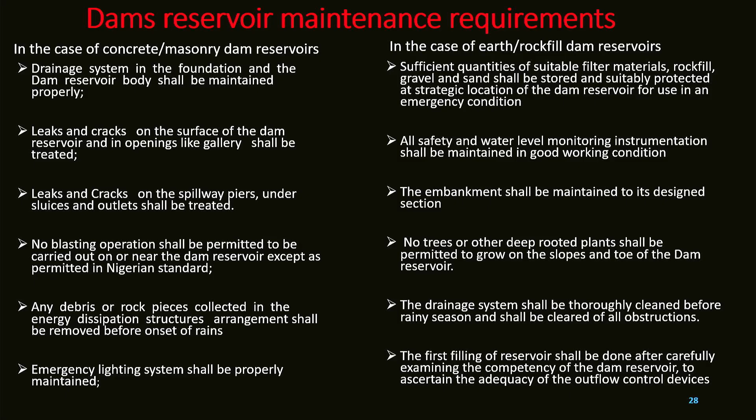Safety water level measurements must be implemented. Embankments must be maintained and inspected by those who are supposed to do the inspection. The drainage systems are thoroughly cleared, and of course, ensure that people do not throw rubbish into most of the dams. So these are all issues we must look at.

The emergency operation is also very critical. Dam reservoir owners, for example, must identify emergency conditions which could endanger the integrity of the dam reservoir and may require immediate action. We must prescribe the procedure and show most of those dam reservoir owners and the personnel employed to ensure the correct thing is done.

We must provide timely warning to the appropriate emergency management agencies for the implementation of those emergencies. We have various agencies, NEMA for example, SEMA for example. It is not only when there is a problem that you're looking for blankets, looking for bread, no. You have to walk hand in hand. Even sometimes when you are taking readings, take them along to where you are going, so that when there's an emergency, they are all involved in it.

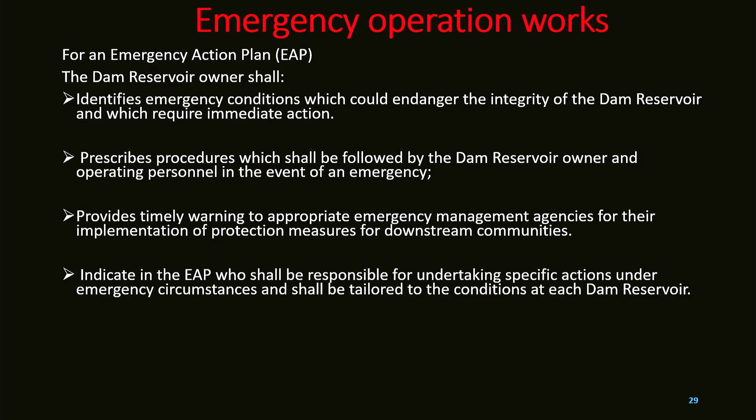The code must also be given to them for them to do their work effectively. We must provide and indicate exactly what the emergency action plans are, which are quite important. This must be documented in terms of the procedure: who is supposed to do it, at what time, and who is supposed to report to. There has to be a command chain. These are very important issues that we must look at if we are to make progress.

If the dam is working well, no problem. But the time will come that the dam is not working well, and that means we need to decommission. Decommissioning is a profession of itself. You need an expert to decommission a dam, but there are quite a lot of experienced dam inspectors who have the ability and know exactly what they are supposed to do. So when it is time for decommissioning a reservoir, the owner shall prepare a dam safety decommissioning plan, which outlines the proposed action to be taken.

The extent of modification required for the safe decommissioning of a dam reservoir shall be assessed by an experienced engineer, and this must include, for example, effective removal of part of the main wall. You don't just come there and remove everything with a bulldozer. No, it has to be systematic. This is what the code is saying, that you must do things in a systematic way.

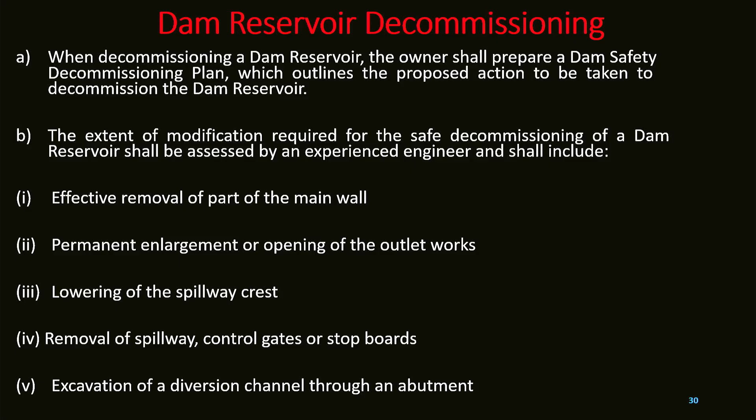Permanent enlargement or opening of the outlet must be done. Lowering of the spillway crest, for example, the removal of the spillway, the control gates, and the stop board must be done according to laid down procedures. We must excavate the diversion channels through whatever means so that you do not cause other problems that are likely to come up. This must be done, and you must ensure that it is done correctly.

The dam safety decommissioning plan shall also include a time sequence of studies and work associated with this decommissioning. It is unprofessional, for example, if an oil well is not working. I know quite a lot of people in Aberdeen, because in the northern part of Scotland, most of the wells that have been producing for quite some time need to be decommissioned. Experts have come all the way from Nigeria to Aberdeen and offshore to decommission wells.

The same applies for dams. We must decommission in line with the technical specifications. This means the impact of a sudden loss of remaining embankment on a dam could be very grievous. So we must ensure that flood events comply with the guideline for failure impact assessment of the dam: provision for safe release of stored water, provision to minimize downstream impact, and provision for consultation with downstream residents and landholders. In addition to safety, the environmental, economic, social, and cultural issues must be considered holistically in the decommissioning of dams.

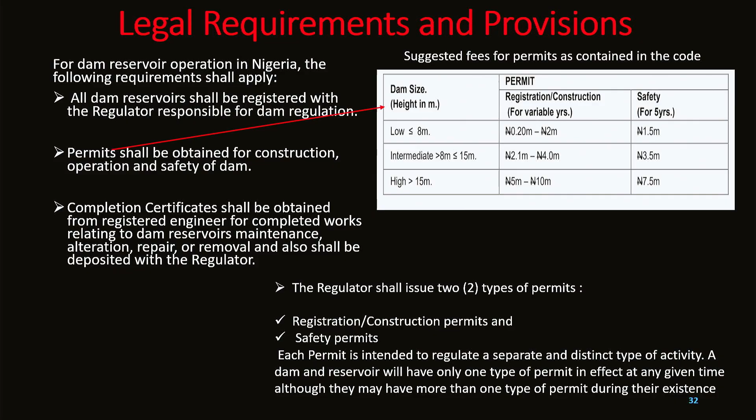We must ensure that these things are done, and they have to be backed up by law. Of course, it's already a law because it's approved by the Standards Organisation of Nigeria. By implication, we must ensure that we do the right thing. In all this regulation, and that is why the legal department is very important, a completion certificate shall be obtained from a registered engineer for the completed work related to dam reservoir maintenance, the various repairs that we have. The regulator shall have two permits: registration construction permit, and safety permit. The safety permit is every five years, because safety you need to check. At the end of the year, you need to give them what we call the clean slate, and of course they have to pay for it. These are very important that we must do.

Finally, ladies and gentlemen, let us look at some few conclusions. The Code of Practice provides a framework for identifying and mitigating potential risks associated with reservoir operation, ensuring that the safety of the people and the environment is uppermost. The code establishes standard guidelines for reservoir operation, maintenance, and emergency response, promoting consistency in terms of best practice across Nigeria and actually all over the world.

We also have the code that provides a clear regulation framework for reservoir operators, ensuring compliance with the various relevant laws and regulations, and promoting accountability among dam owners and operators are strictly adhered to. By providing the guideline for safe and responsible reservoir operation, the code helps protect lives, property, and the environment from potential hazards associated with dam failures and uncontrolled releases.

Some few conclusions: dam owners and operators should conduct regular inspections and maintenance of reservoir structures to ensure safe and efficient operations. All owners and operators should develop and regularly update emergency response plans to address potential hazards and minimize risks to the people. In a situation where the dam has been constructed for 40 years, the gate valve has never been turned once. Now, when you have an emergency, how do you release the water?

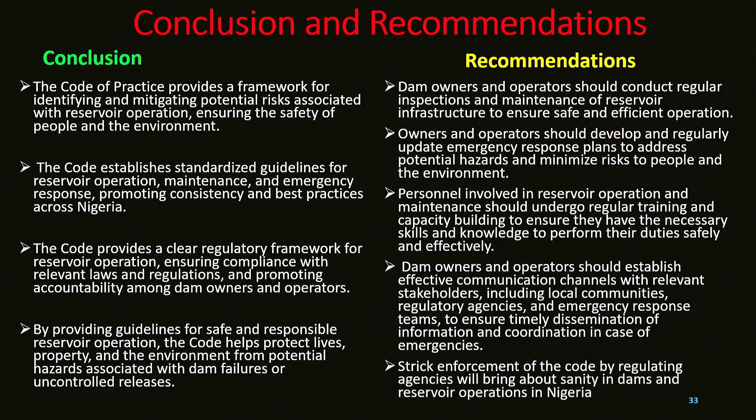I want to thank you very much for listening. The other aspect will just be a little bit about the code itself. I'm not going to read it verbatim, just to tell you how it came from the standard organization before we had this. The people that proposed this are everybody in the country—right from the institute, all of us championed it, walking back and forth.

We have people also from the Nigeria Integrated Water Resources Commission, the Federal Ministry of Power, Federal Ministry of Environment, Shiroro Hydropower—they're all there. Water resources academia are there, River Basin Authorities are there. We have the Upper Benue, they're all part of the River Basin.

The dam and reservoir inspection—I think Engineer Madu represented us. You have the Lower Benue out there, water resources in the states. The whole idea, since it's a national document, is that everybody is carried along. We also have consultants as part of it, the State Water Board, principal partners, state and national emergency management, so they cannot say they are not aware. We have standard organizations, about three of them, and they were the secretary, because at the final note they had to go to their board for their approval.

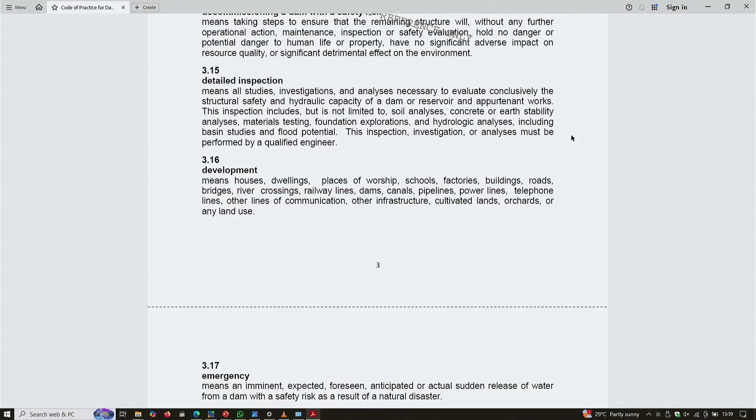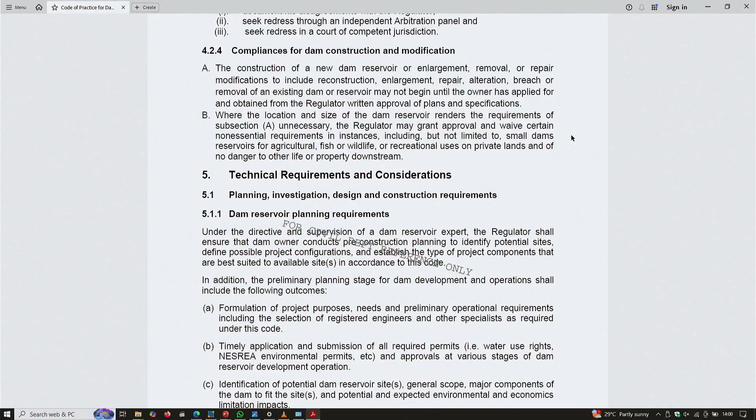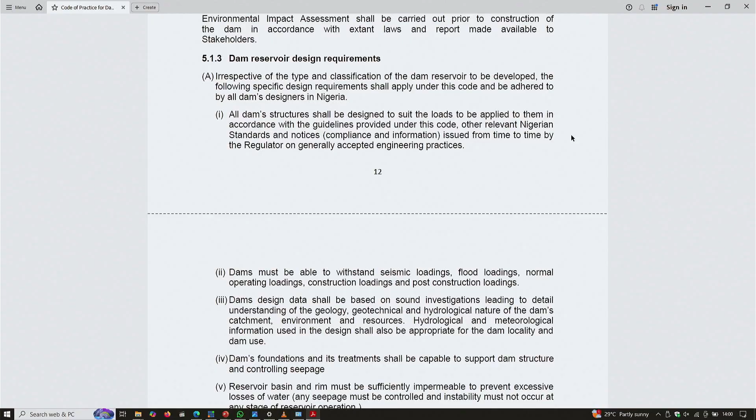We also had quite a lot of the definitions of terms covered in every part of it. We have quite a lot, right from dam classification, to what you have for commissioning as part of it. You also had the emergency procedures—everything I've been talking about—well explained. Who is an engineer, for example? Who is a hydrogeologist? Everything has been defined. So it's a standard document that we've looked at, covering the various roles by the various commissions, the people involved, and so on.

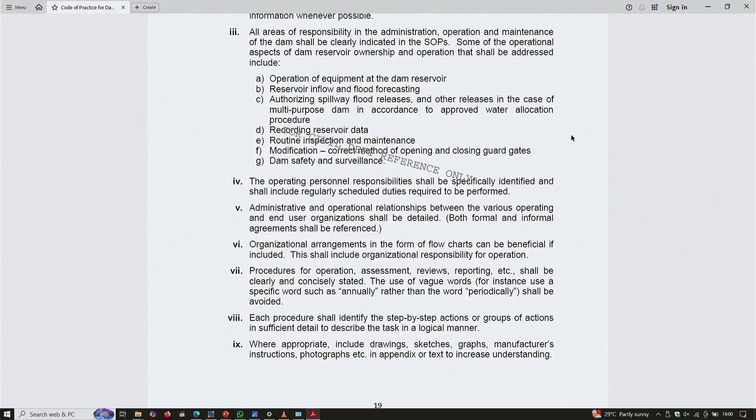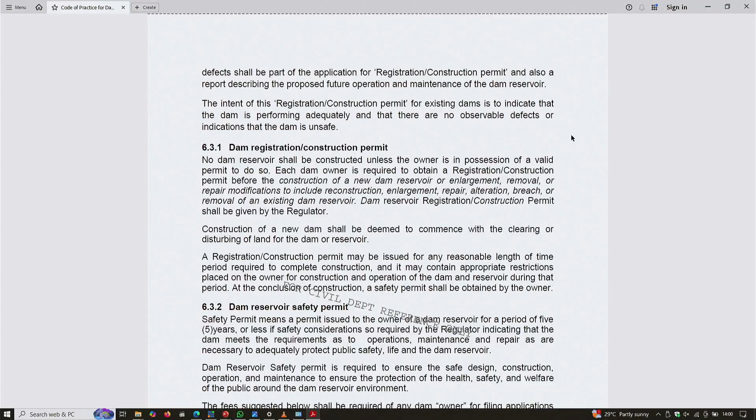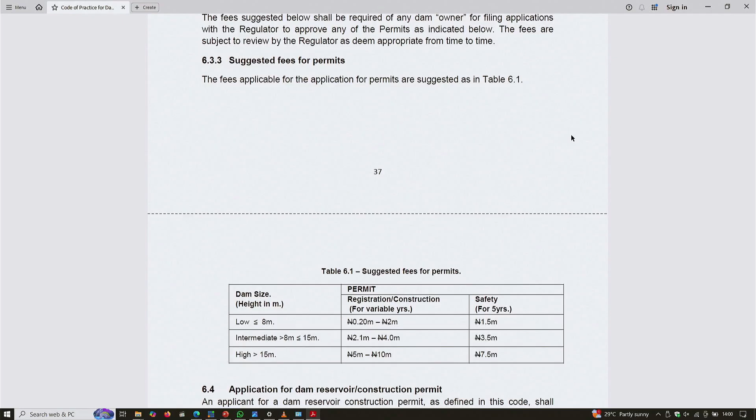So I think it's about a 100-page document. Then lastly, which is very important, you have most of the forms that are there—the forms for inspections, because even in most areas... okay, let me go to the form. Can you go to the form there and make it quite fast? Yes, start from the form.

Now, even as an inspector, you don't need to reinvent any wheel. All that is required: what is the name of the dam? What are you looking at? Are you looking at the structure? Are you looking at the various cracks within the dam? Everything is specified there. So you use the whole form to do your analysis and write your report. This moves from stage to stage, from approval, and the safety license is issued from there based on your observation. So this is what it's supposed to be, so that at the end of the day, even if you are looking for a license, the form is already there for you to do.

I've agreed that you should have a soft copy of this. Look at the soft copy from the beginning to the end, so you can acquaint yourself with all the terminologies, the forms, and how to fill them. Everything is there. I think if we do this, we'll be doing ourselves good, we'll be doing the country good, and in terms of safety, we'll be there. I thank you very much for listening, and God bless all of you.